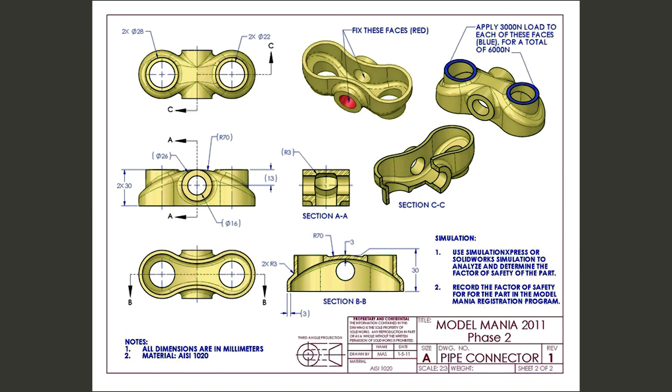In a world of possibilities, our talents bloomed. From the sketch pad to reality, watch us soar. With every click and curve, we crave for more. From the smallest bolt to towering steel, with CATIA, our thoughts become real. Together we'll create wonders to see. In this world of design, just you and me. Step aside now, let's make way. With CATIA, we'll change the day. Innovation's heartbeat, hear it beat. In the land of dreams, we find our seat.

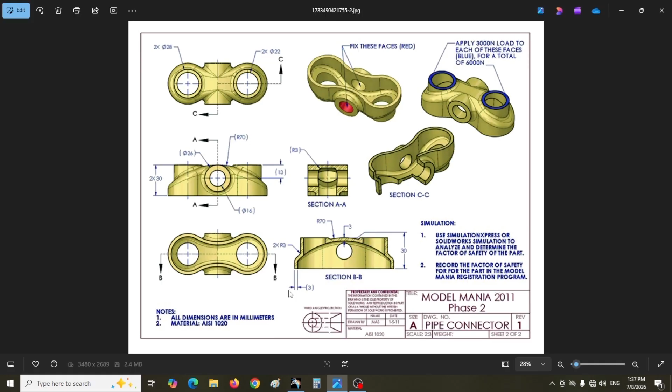Hello everyone. For today's exercise, I have chosen this shape. As you can see, it has a main body with a thickness of 3 mm. However, the horizontal tube has a thickness of 5 mm. I will use the solid combine tool to create the main body. After that, I will draw two vertical cylinders with a diameter of 28 mm and a height of 30 mm.

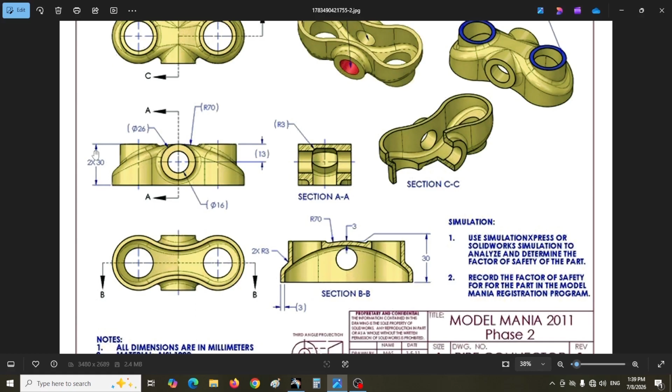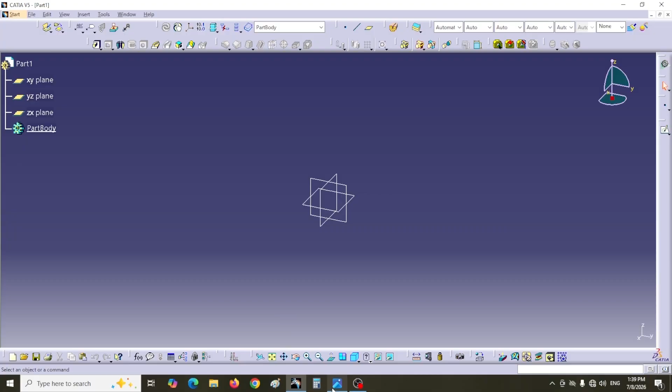In the third step, I will draw a horizontal cylinder with a diameter of 26 mm and a total length of 41 mm. After creating these features, I will use the shell tool to hollow the part with a thickness of 3 mm. Then I will create the holes in the vertical cylinders with a diameter of 22 mm.

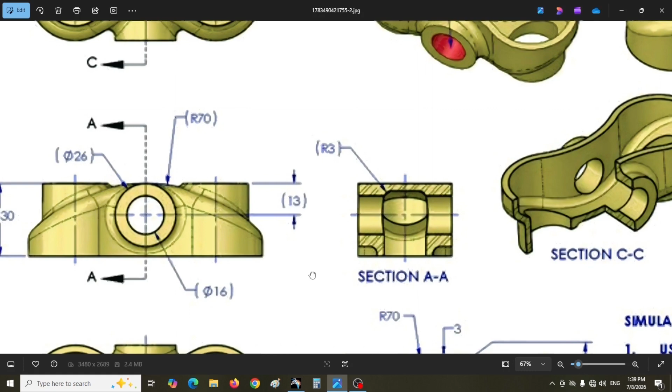Now I will create the inner hole of the horizontal cylinder with a diameter of 16 mm. Here, because the body has a thickness of 3 mm, a step is created along the 16 mm hole. There is a suitable tool in the part design workbench to solve this problem. Finally, I will create all the fillets. Then I will compare the final model with the drawing.

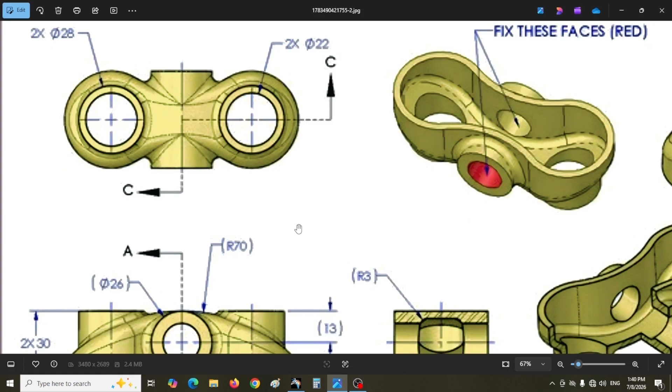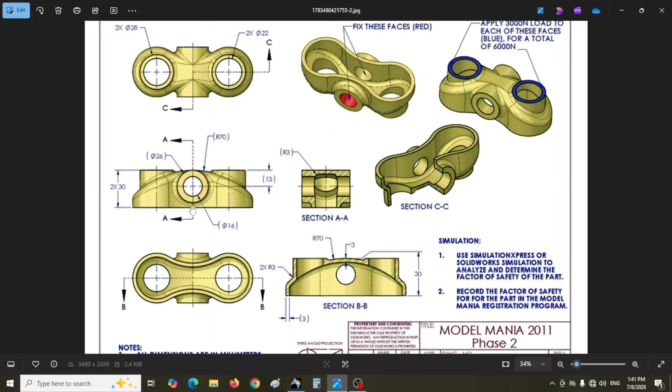I will move one of the fillets. As you can see, not all dimensions are given in the drawing. I will use the DMU 2D Viewer workbench for help. Since the measured dimensions are approximate, I will make corrections whenever necessary. First, I will define the origin point of the coordinate system. I will show this section to you with the mouse. Then I will define the coordinate axis.

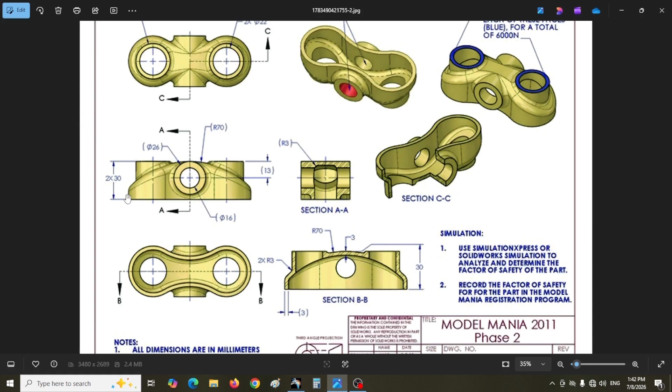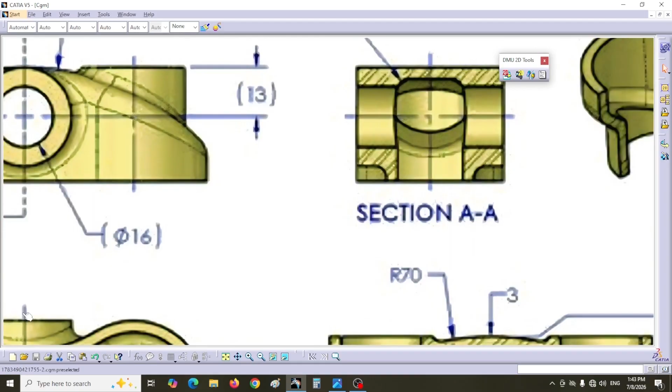First, I want to draw this section. According to the 3D model, I will select the YZ plane in the drawing. Then I will enter the Sketcher workbench. If you look at the drawing, you will notice that the overall length, the height of the straight vertical section, and the radius of the outer edges are not given. I will obtain these dimensions using the DMU 2D Viewer workbench.

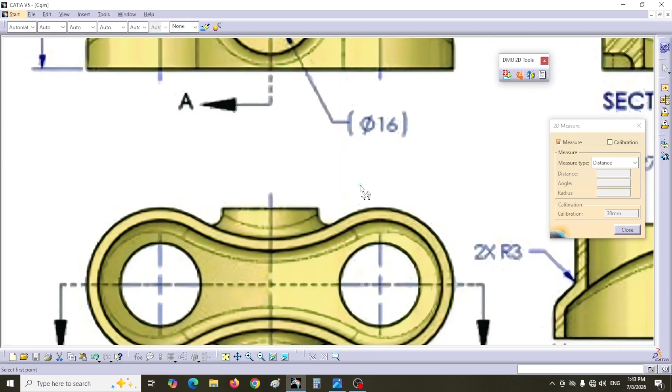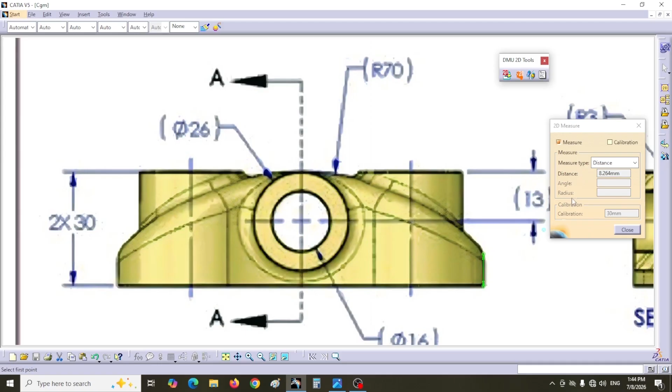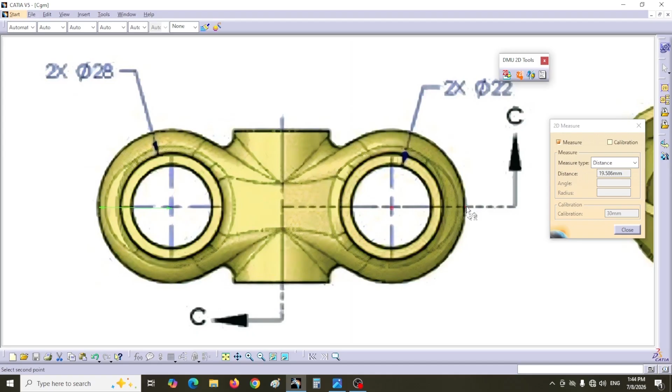The overall length of the part is approximately 99 mm. The height of the vertical section is approximately 8 mm. The radius of the outer edges is approximately 20.5 mm. According to the drawing, the radius of the upper arc is 70 mm. With this information, I will draw the first sketch.

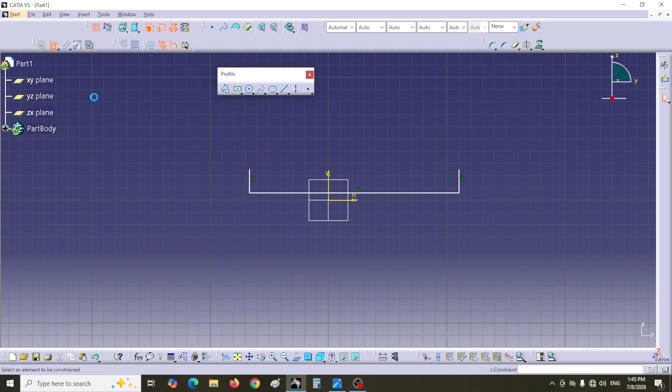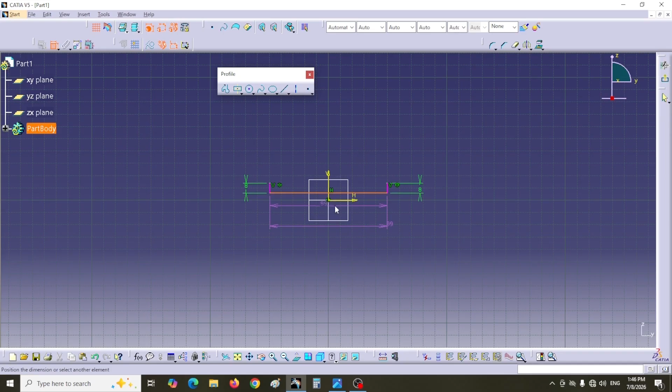First, I will use the profile command to draw the straight lines. Then I will apply the dimensions and constraints. The bottom line is coincident with the horizontal axis. Next, I will draw a 3-point arc. Both ends of the arc are coincident with the ends of the vertical edges.

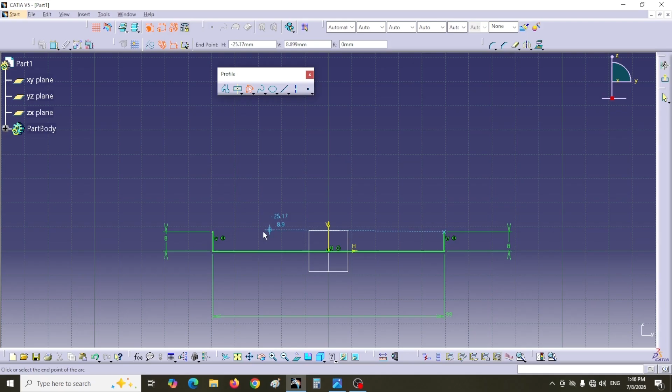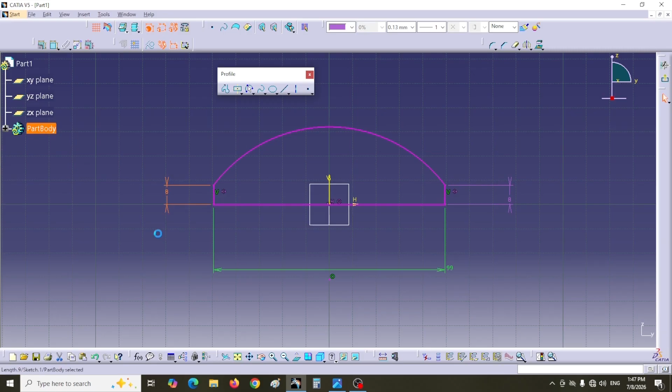The center of the arc is coincident with the vertical axis. I will set the arc radius to 70 mm. The sketch is now fully constrained and turns green. I will return to the part design workbench. I will select the XY plane and enter the sketcher workbench.

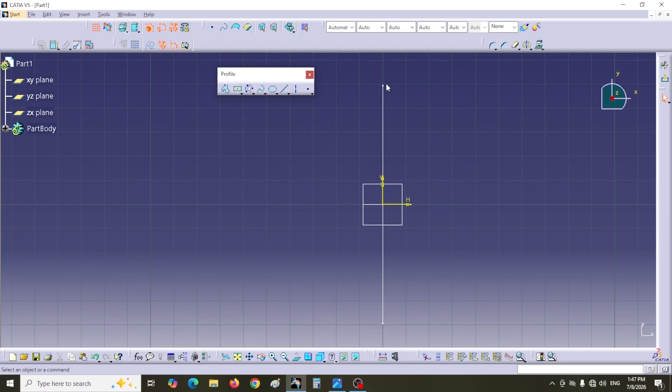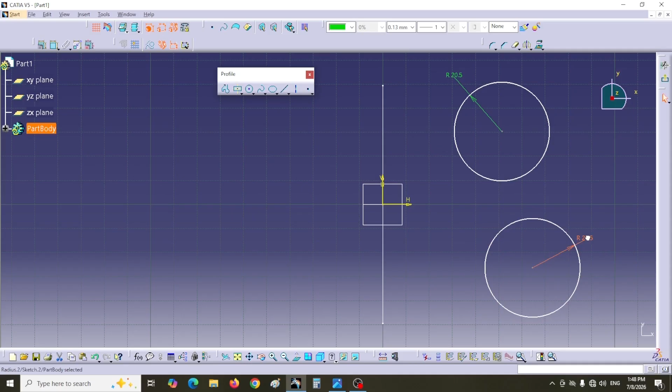Notice that the length of the first sketch is now aligned with the vertical axis. Therefore, I will draw the sketch so that its length is along the vertical axis. I will draw two circles with a radius of 20.5 mm. I will draw a center line from the center of the first circle to the center of the second circle. I will apply a vertical constraint to the center line.

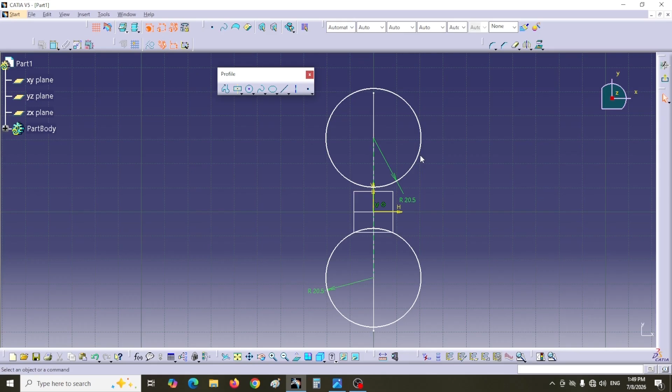I will make this center line coincident with the vertical axis of the sketch. I will make each circle coincident with one edge of the first sketch.

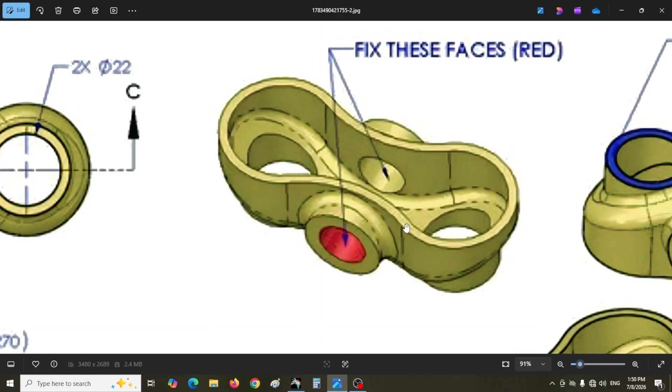If you look at the shape, you will see that it has a curved profile in the middle section. I will measure this curve using the DMU 2D Viewer tool. Remember, this tool can also measure the radius of an arc. Keep in mind that measuring the arc here may result in a significant error. If your model looks very different from the drawing, adjust the dimension.

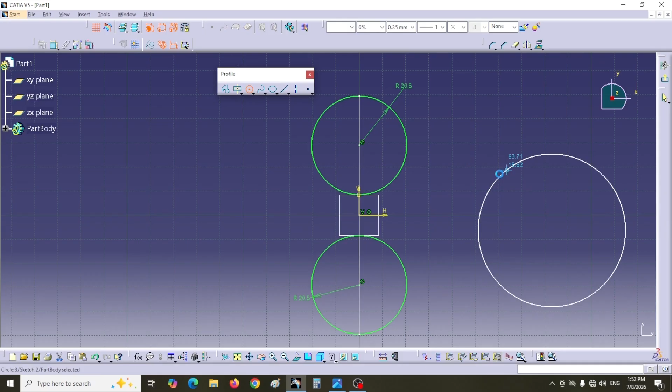I obtain an approximate radius of 43 mm. I will draw a circle with a radius of 43 mm. I will make the circle tangent to the two circles on one side. You can see that the center of the circle lies on the horizontal axis.

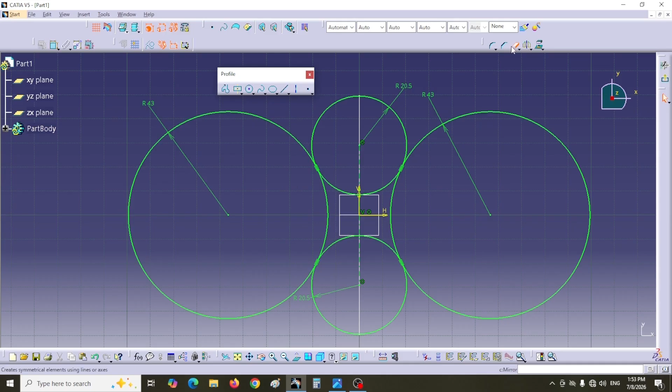Then I will draw another circle with a radius of 43 mm. I will make it tangent to the first two circles from the other side. Now I will trim the extra portions.

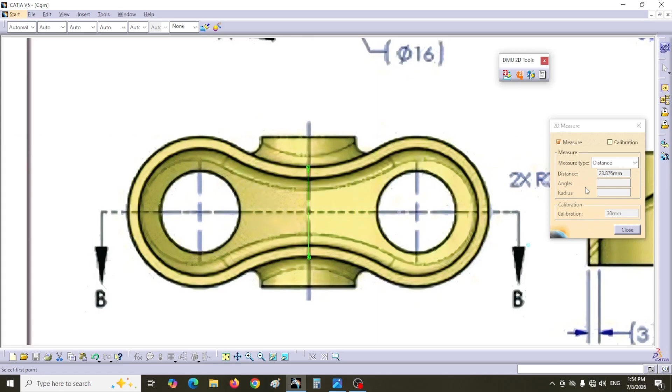I will measure the distance between the two arcs on the drawing. It is approximately 24 mm. Then I will measure the same distance on the sketch. It is approximately 27 mm. Therefore, I need to modify the two radii.

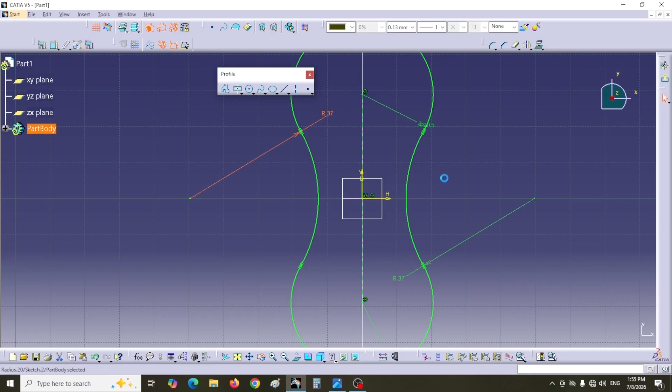I will change the radius from 43 mm to 37 mm. Then I will measure the distance between the two arcs again. Now it is approximately 24 mm. I will use the sketch analysis tool to make sure no unwanted geometry remains.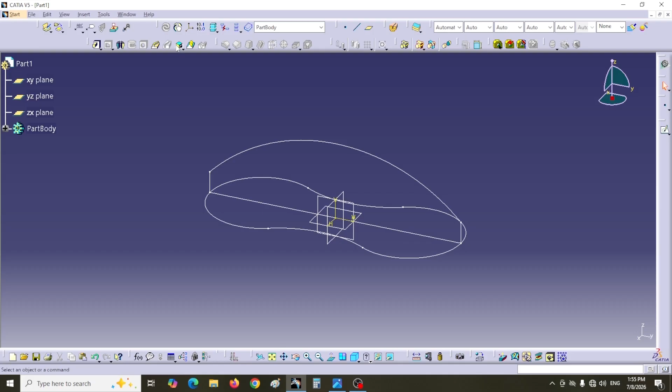I will return to the part design workbench. I will make sure that none of the sketches are selected. I will activate the Solid Combine tool. Then I will select the two sketches. I will click OK. The shape is created.

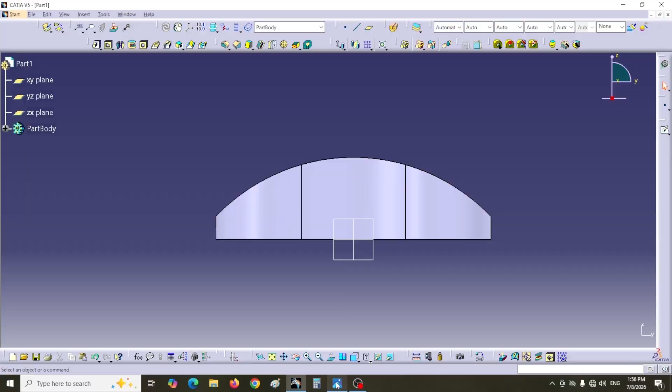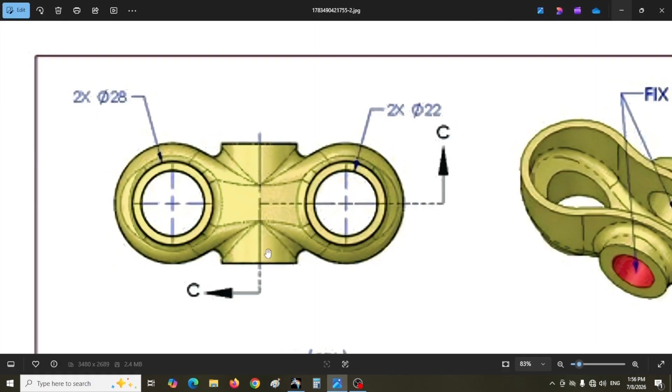I will rotate the view and look at the model from the side and the top. I will compare the generated solid with the drawing. Now I will draw the two vertical cylinders with a diameter of 28 mm. I will enter the sketcher workbench on the XY plane. I draw two circles with a diameter of 28 mm and position them.

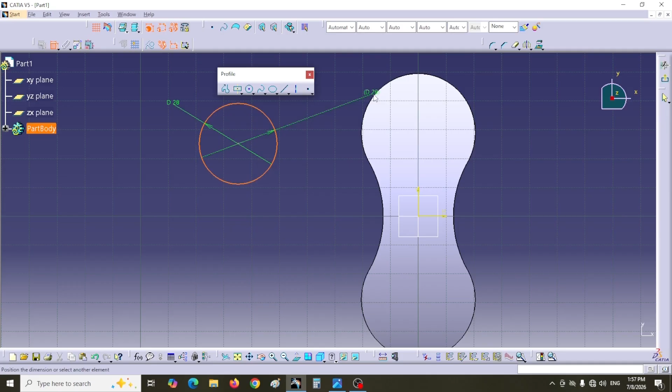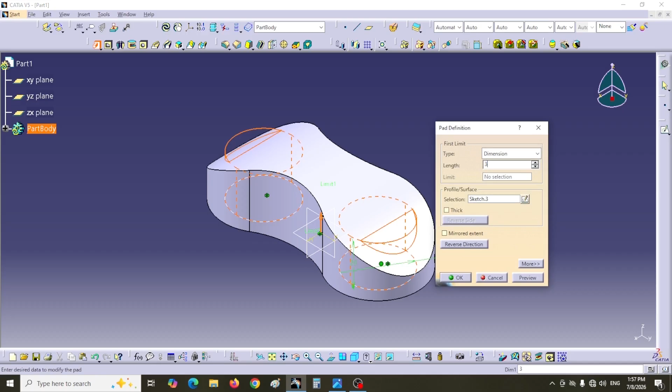I will return to the part design workbench. I will use the pad tool to extrude them to a height of 30 millimeters. Now it is time to create the horizontal cylinder. I will enter the Sketcher workbench on the YZ plane. I will draw a circle with a diameter of 26 millimeters. Then I will position it.

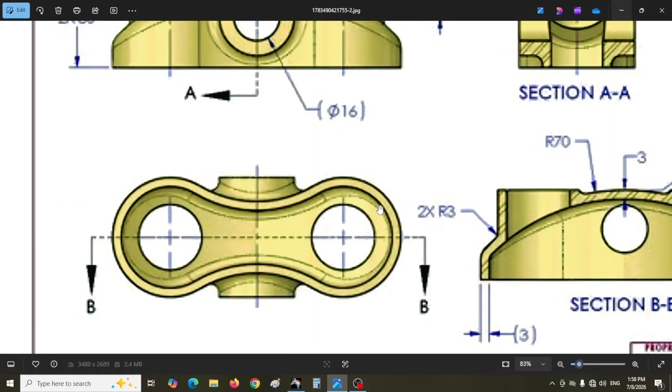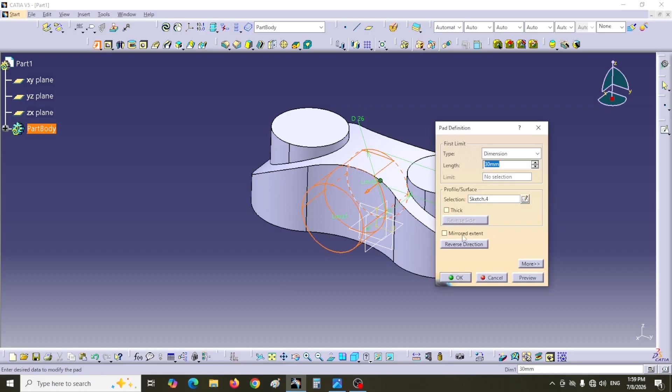I will return to the Part Design workbench. I will use the Pad tool in both directions and extend it by 20.5 millimeters. Now look at the model. You can see that the top surface of the horizontal cylinder is higher than the 70 millimeters arc surface. However, it is not shown in the drawing.

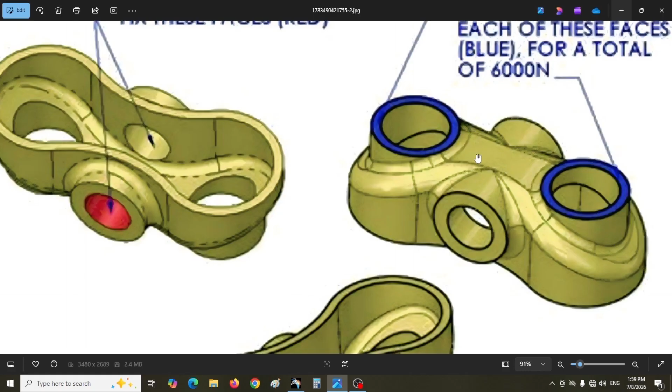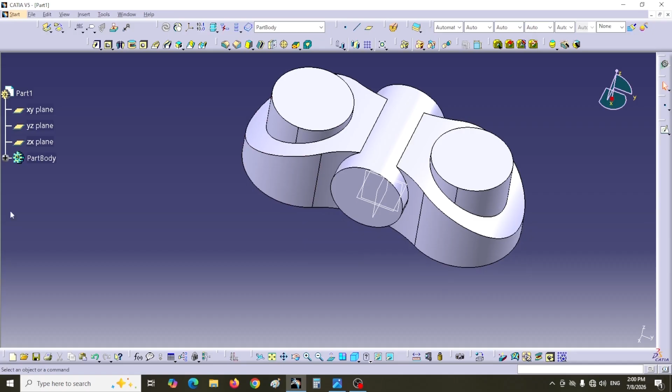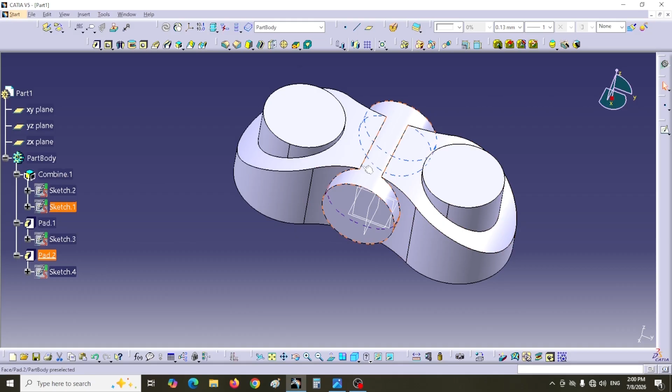I cannot change the 13 mm dimension because this dimension is specified in the drawing. But I can change the height of the vertical line in the first sketch from 8 mm to 9 mm. I will do that. It looks better, but it is still not enough. I will increase the height of the line by another 1 mm.

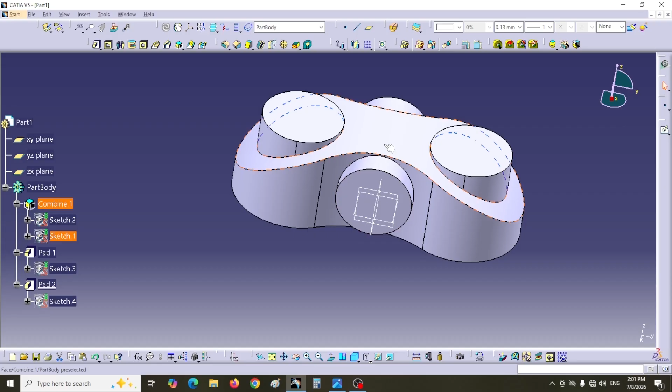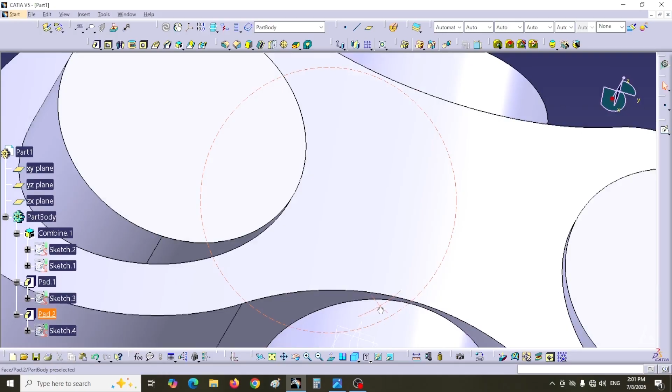Now I can see that the top surface of the horizontal cylinder is slightly lower. I will measure the difference. It is approximately 0.5 mm. I will correct the dimension in the first sketch once again. The model is now complete.

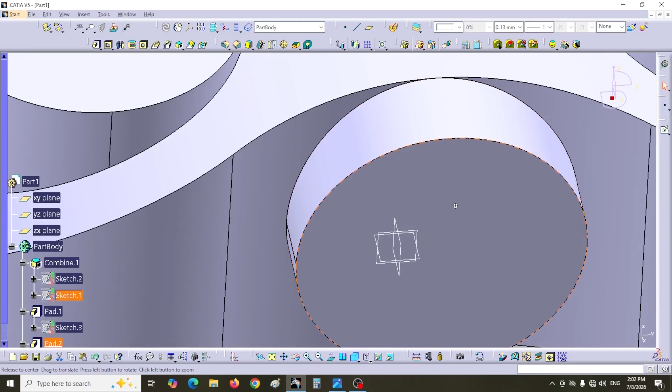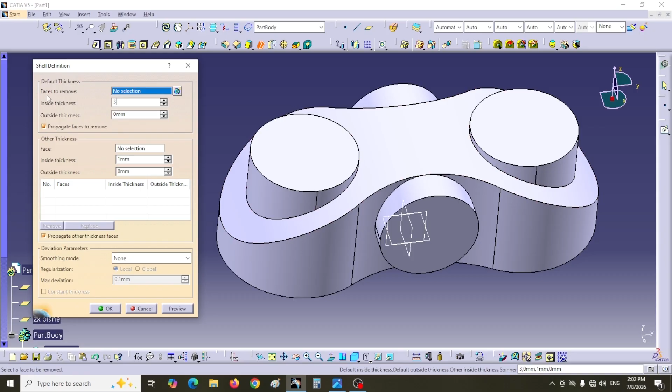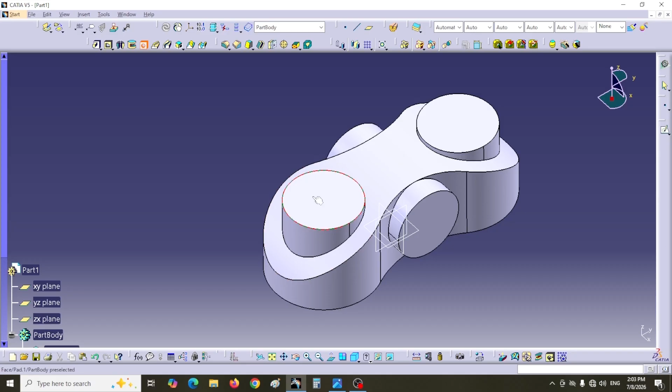I will activate the shell command. I will set the thickness to 3 mm and select the bottom face of the part as the face to remove. I will click OK. The solid is now hollow. Now I will create the holes in the vertical cylinders with a diameter of 22 mm. I will use the hole tool. Then I will use the symmetry tool to create the second hole on the other cylinder.

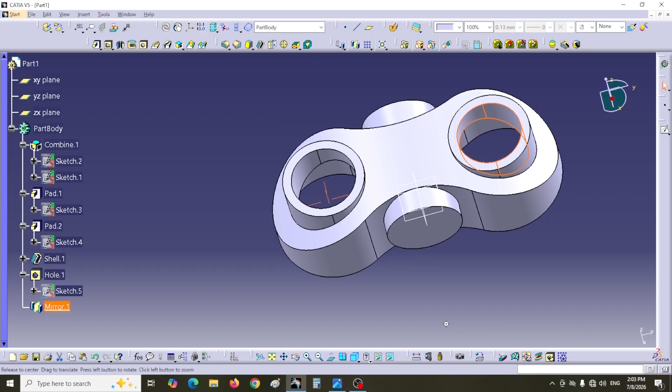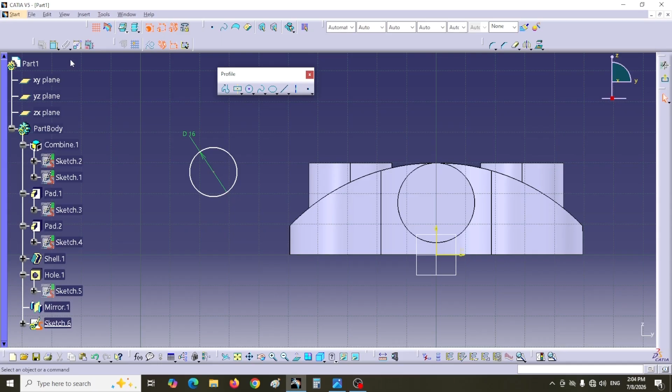Now it is time to create the hole in the horizontal cylinder. I will enter the Sketcher workbench on its face. I will draw a circle with a diameter of 16 mm and position it. I will return to the part design workbench. I will create the hole using the pocket command.

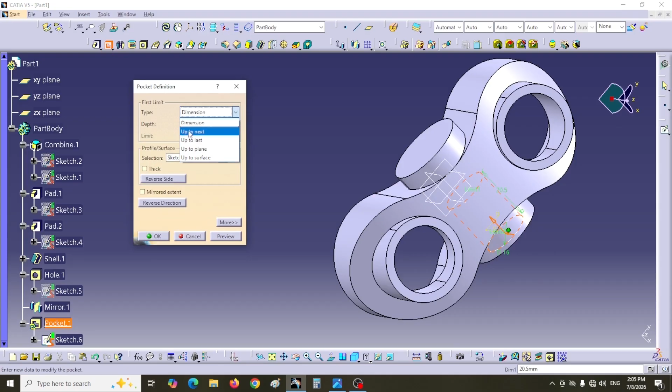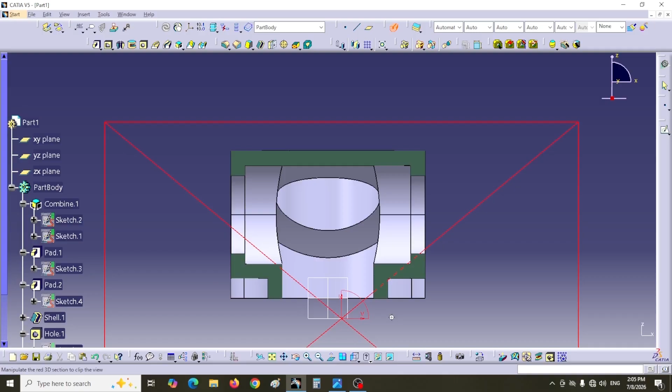Now the problem appears. One section of the hole is larger than the rest. This step is 2 mm on each side. There is a tool in the part design workbench called thickness. It is a very useful and powerful tool. I activate this tool. I will enter 2 mm in the thickness field.

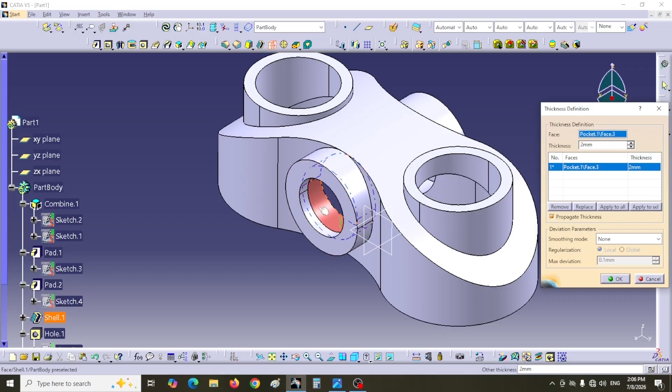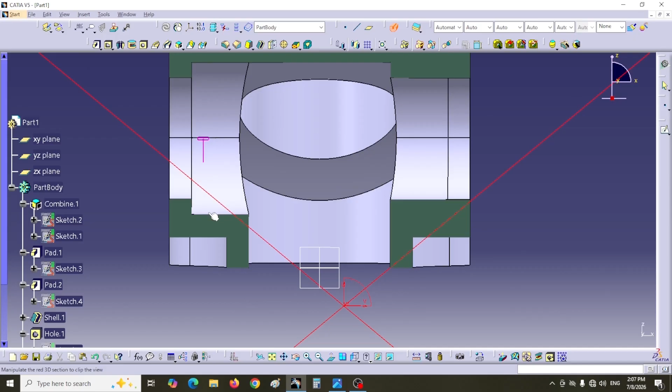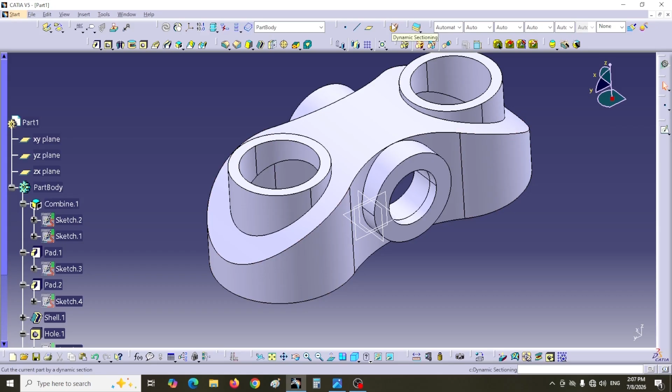Then I will click the face field to activate it. Now I will select the step face. This face turns brown. I will click OK. As you can see, the step has been filled. Now both surfaces are flush. I will do the same for the other side. I will use the dynamic sectioning tool to create a section view and inspect the model.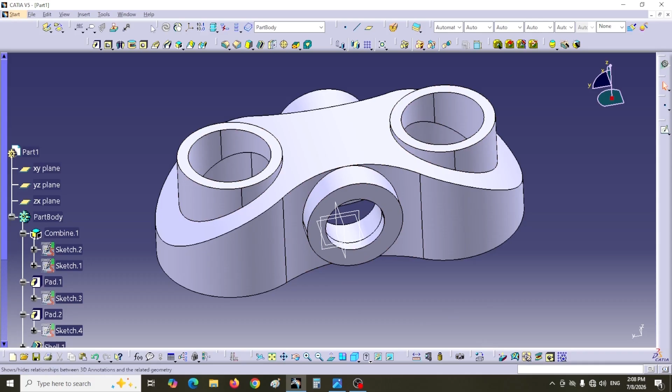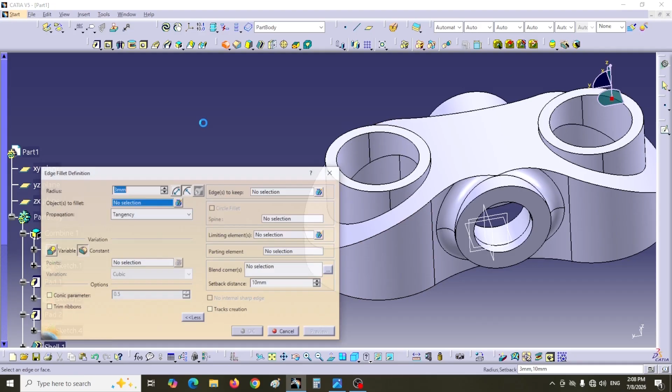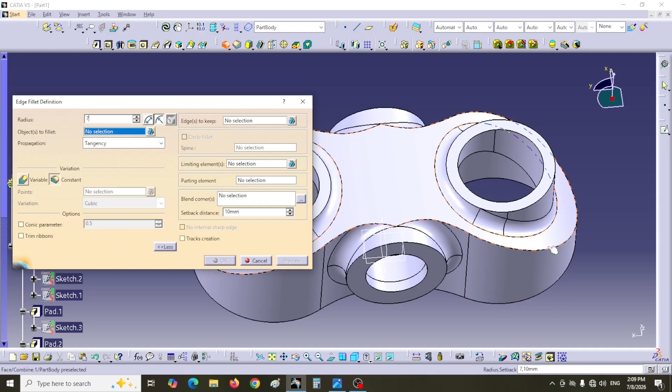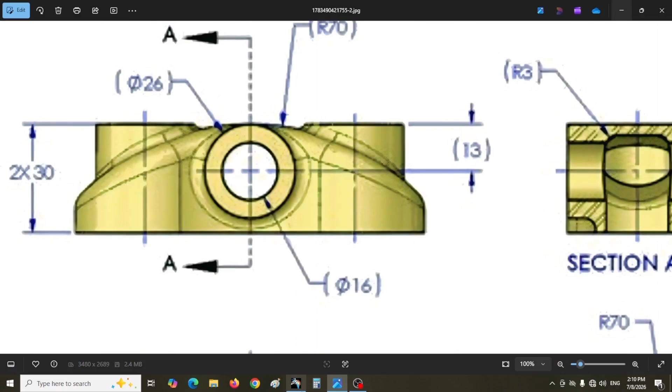Now I will create the fillets. First I will apply a 3 mm fillet around the cylinders. Then I will apply a 7 mm fillet around the outer shape. I inspect the part from the side and the top. From the top view, it seems that our model is different from the drawing.

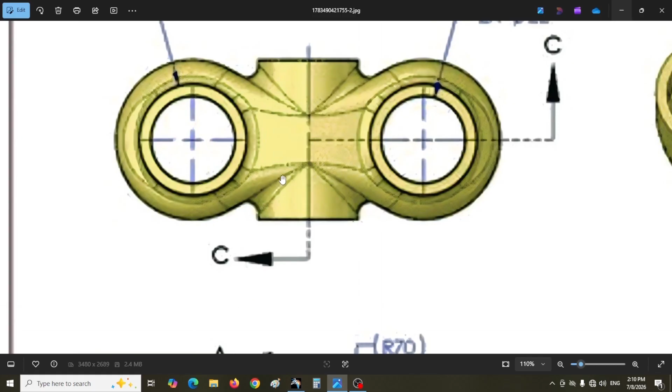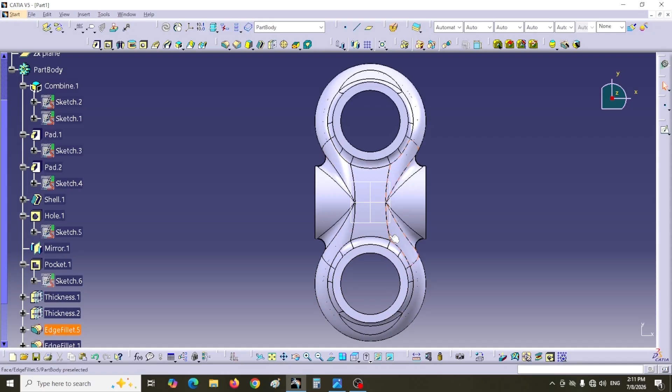I will move the last fillet to the position of the first fillet. I will click the fillet with the mouse and drag it upward. I have placed the selected fillet as the first fillet in the specification tree. Now compare the generated model with the drawing again. You can see that the problem has been solved. As you have seen, it is possible to reorder features in the specification tree. However, this is not always possible.